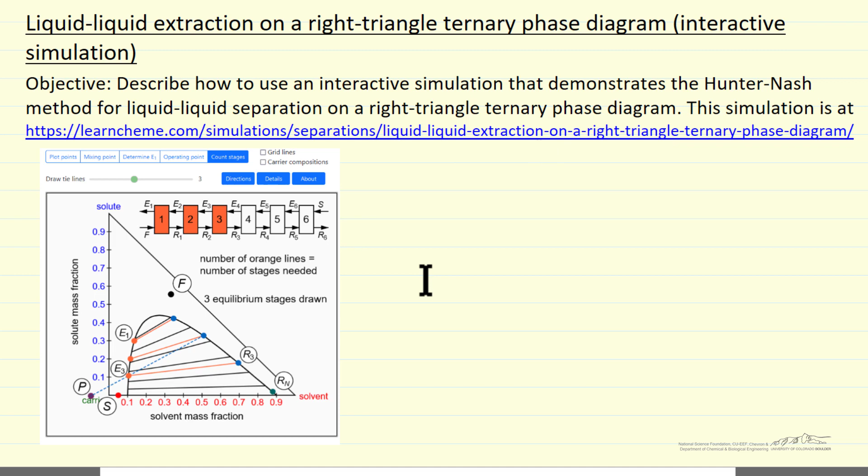I'm going to briefly describe how we use an interactive simulation that looks at liquid-liquid extraction, essentially the Hunter-Nash method, on a right triangle ternary phase diagram. The simulation is located in the LearnChemE site at this link. What we're going to do is look at the simulation and observe some of its behavior.

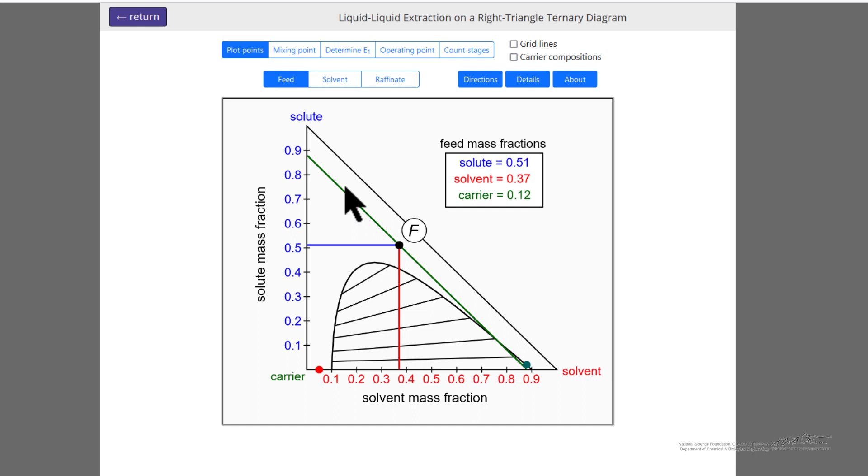So here's the simulation. The feed contains all three components: a solute, a solvent, and a carrier that we're using to separate the solute from the carrier. Over a limited range, we can move the composition of the feed. These three lines just show you how we measure the values, the mass fractions that we show here. We have solvent down here, and then the raffinate, the final composition that we're aiming for.

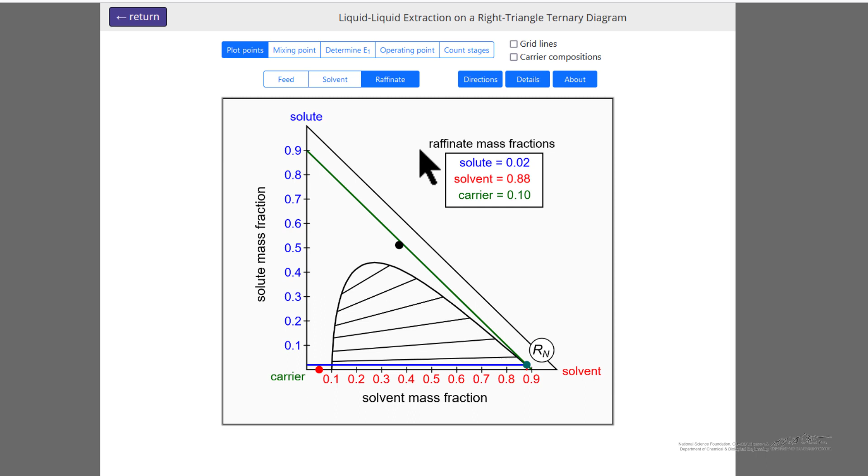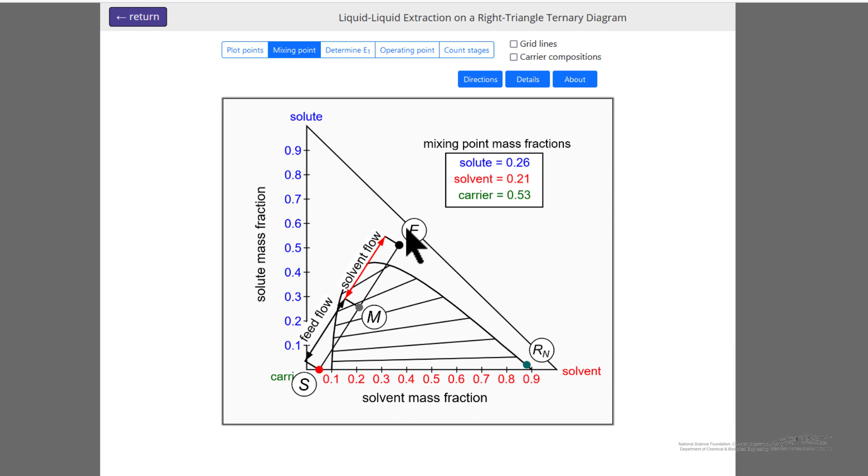If we go to the mixing point, what the simulation does is calculate, so the feed and the solvent enter the system. The mixing point is average composition. If we mix these two streams together, we get this from mass balance, and where this is located in the graph is related to what the relative flow rates are. These numbers are already specified in the simulation.

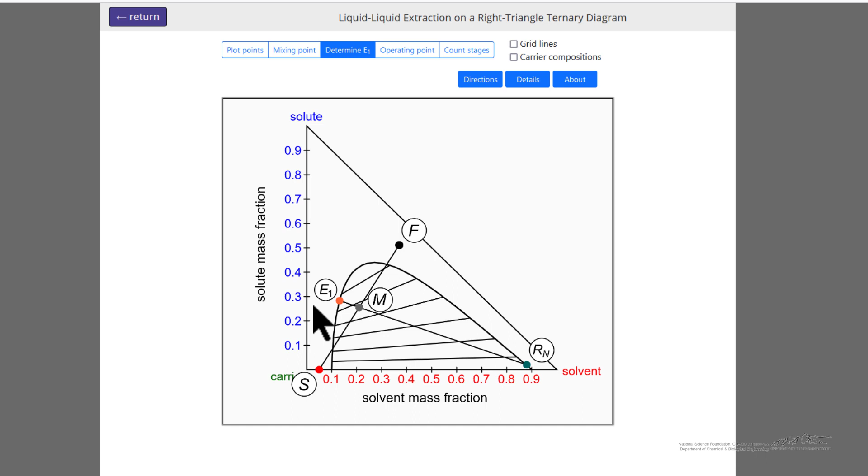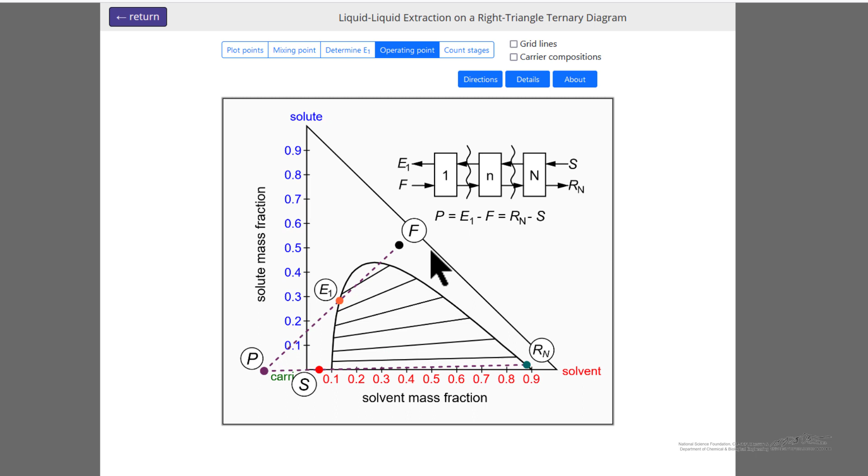Once we have the mixing point, we can determine the composition of E1 leaving stage 1. Again, just mass balances. Then we can determine an operating point, again mass balances, as shown here, which allows us to show graphically the stages. So if we want to count the stages now, we can use the slider to count the stages.

So the first stage: E1's leaving the system, solvent comes in and picks up solute, and the feed comes in and loses solute. So we have E1, we have R1, we go back. This is how we determine P, and now we can count stages where E1 is in equilibrium. This is just the tie line, the orange line.

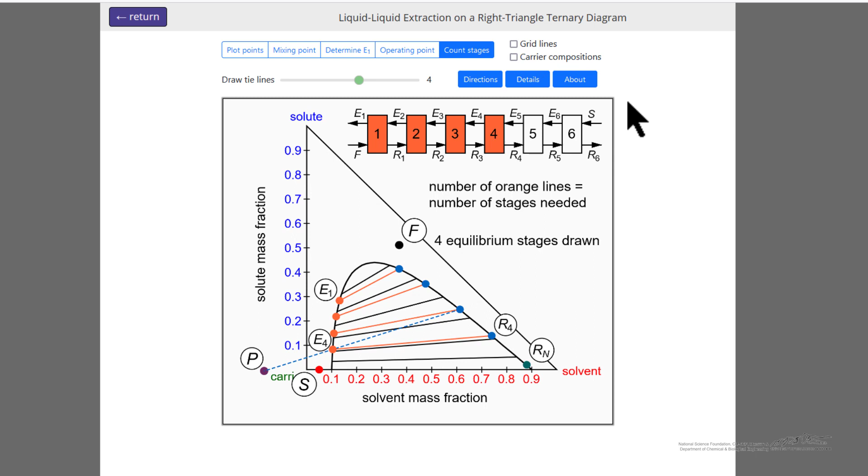We can then determine E2 using, again, mass balances. That allows us to get R2, the next stage, and we can keep stepping through the number of stages in the system. The simulation has some directions on how to use it, details on the mass balances that we're using here, and if we want, we can add grid lines to the system. So the idea of the simulation is to help you understand the Hunter-Nash method on a right triangle phase diagram.